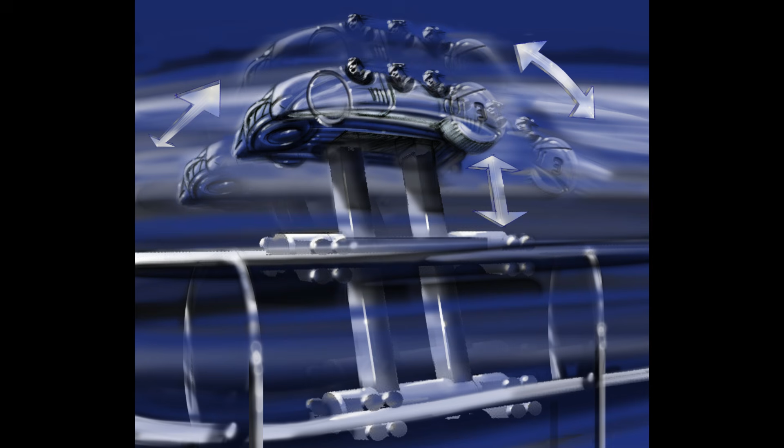The cantilever roller coaster is an interesting concept because it is one that kind of actually does exist today with the Donkey Kong roller coasters at the Universal parks. The major differences stem from the axis of movement which were proposed in the ideas. Now, there were patents filed for this design way back in 1999, which were not approved until August of 2001. Now, these expired in July of 2019, which I believe is probably what allowed Universal to create their own rendition.

The ride vehicle was meant to traverse along a set of vertical rails which allowed the car to shift on multiple axes, where the Donkey Kong roller coaster kind of only has one axis that it traverses. This design was something that was created independently, yet would be built through Setpoint, although, as we all know, it was never truly built. In fact, most people were likely never even aware of its existence because it never had a ton of traction behind it.

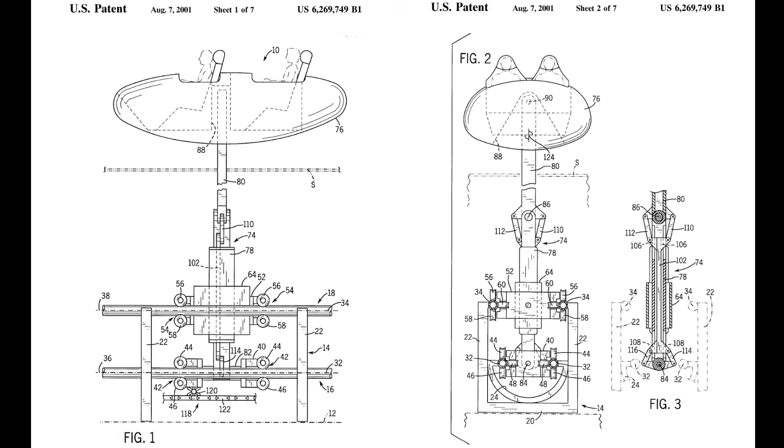This is generally the issue with some of these concepts, is that there's really a lack of information to be found online about these designs, especially things that were from around the turn of the century, where not everything was fully integrated into the World Wide Web yet, limiting the dispersion of knowledge, especially in certain niches. This one is particularly interesting as the concepts and patents for the design were independently pushed, hoping that a manufacturer or a park would pick them up and run with it. This, sadly, would never happen. Well, at least kind of.

Setpoint is actually the manufacturer of the Mine-Cart Madness rides, so it seems as though they may have gotten some heavy inspiration from the original 20 years ago. The optimism for new innovations in the industry was at an all-time high during the turn of the century, and the coaster wars which occurred during that period.

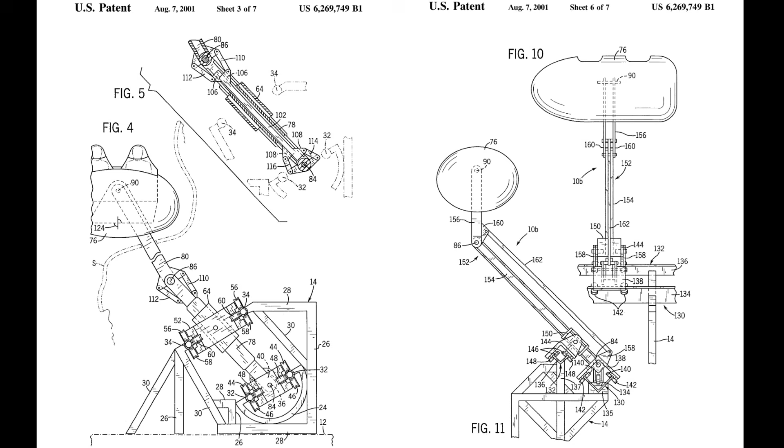The Vekoma dive pretzel is a very unique case, as not only is it the newest model in this video, but it also had a real sale. At least a portion of this ride was fabricated and constructed in China, yet the project was never completed before the ride sat dormant for a few years and ended up getting demolished. The dive pretzel appears to be some sort of crossover between a Eurofighter, a Maurer X-Car, and maybe even a little bit of the Intamin Space Diver.

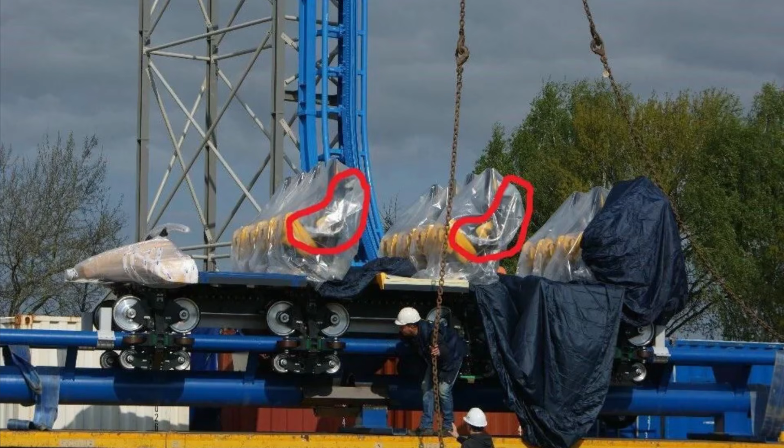The most interesting part of this is looking at the trains, as they appear to have a different form of restraints, which is possibly the first showcase of their restraints which have showed up on their new generation rides. The entire ride looks quite different from anything Vekoma has ever constructed, as it has a completely unique track profiling for them. Now, by the end of 2016, progress on the ride was reversed, deconstruction began, and it seemed as though fabrication of the track was never completed. The entire mall project was abandoned due to funding and never opened in any capacity.

Even if this had opened, more than likely no one would have really heard much about it anyways, as it would have been a small Chinese park, but it's still sad to see the project fall apart this way. There was a rumor about this model being proposed to one of the parks slated for Orlando that never panned out, although I could probably make an entire video about extravagant failures of park proposals in Florida over the last few decades.

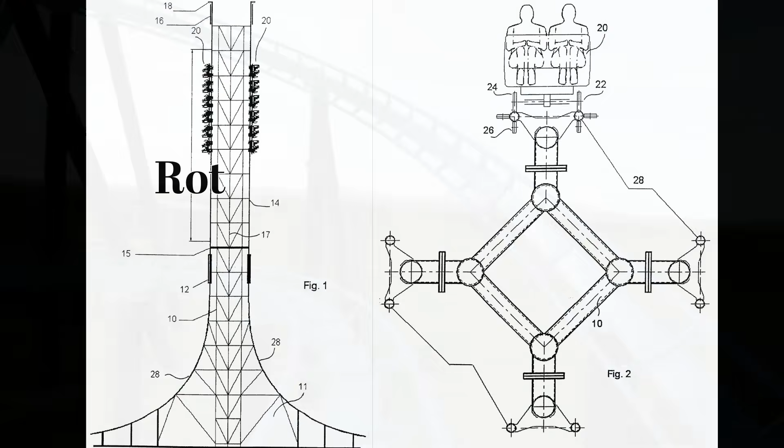The Stengel Tower Coaster is another example of a patented design which made its way into Roller Coaster Tycoon 3. In this game, it was known as the Rotating Tower Coaster. This concept was designed by Werner Stengel, which is somewhat of a big name in the industry, as he has gotten his name into a lot of different rides, even if he's not a very talked about individual as of late. The patents were filed in late 2001 and were approved in June of 2004. Reading through the patented paperwork, there are even two layouts which were attached to the documents which detailed some of the primary components of the design.

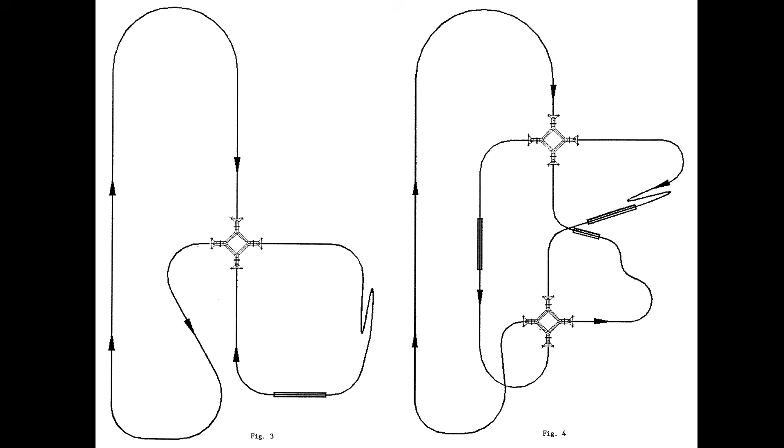The entire idea of the design was to be able to have a vertical rotating post act as a transfer track during the ride. A car would ride up the vertical spike, be pulled up like a kind of a boomerang chain lift, it seems, before the entire tower would rotate 90 degrees to a new track and release the train. The train would travel back down the tower in the reverse direction through some amount of layout before returning to the same tower and spinning back to the original direction. As the tower rotating 90 degrees would need four tracks to constantly have attachment ready, Stengel planned to use all four sides as connections to the rest of the layout.

This looks like it had the potential to be a very dynamic ride, which would bear some resemblance to the family coasters which have begun popping up, where they kind of travel one direction, spin, and then travel back. But perhaps this design was just too far ahead of its time to ever succeed. The technology demonstrated here would allow for some extremely unique layouts and elements. It's quite a shame that this was never a real ride, although it does look to be a technical nightmare, so there's not really too much of a wonder as to why it didn't, especially for the early 2000s.

Now you may be thinking, Giovanola? Really? Yep, you better believe it. Back in their day, they actually had some real innovation outside of a single inverted coaster and two somewhat lackluster hypercoasters. However, nothing ended up working out for them the way that they would have wished. This was something that got showcased at IAAPA in 2000, 2 years before Gravity Max opened. Not only was it before Gravity Max, but it was also quite a bit cooler in my opinion.

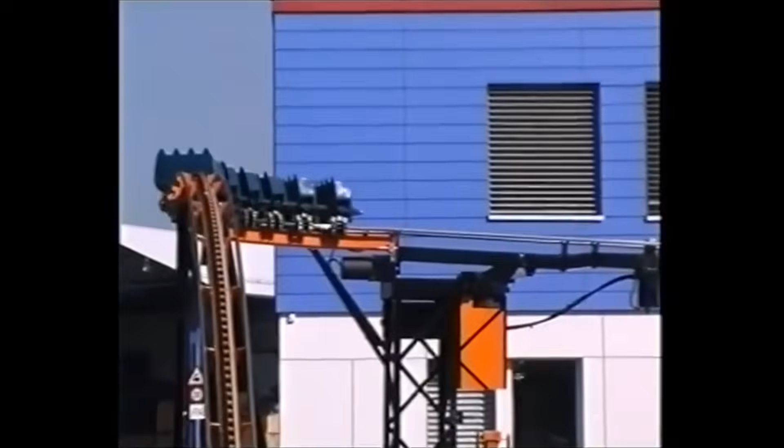While an initial simulation and patent paper which showcased a design with the backdrop of Magic Mountain actually had a more simple truss tilt track similar to Vekoma, their model was much more interesting. An old video from their showcase, which can be found, showcases a small functional prototype. The main difference is that there's a whole lot more degrees of freedom with this tilt track. It appears that there are three rotational degrees of freedom. Not only is it able to tilt along the train's axis, but it's also able to swivel like a turntable and roll side to side, kind of like the banking of a turn.

This system would probably be overly difficult to construct, however, and it would never end up being constructed. Giovanola would only end up building Titan before becoming a defunct manufacturer. It's very interesting to note that Vekoma did release their tilt model at this time and only sold one. Ultimately, there did not seem to be a market yet for this type of ride, and perhaps Giovanola's design was too far from reality to be sold at this time.

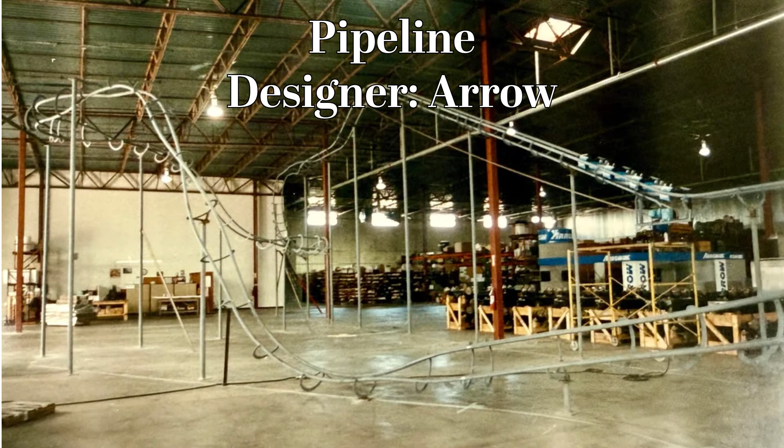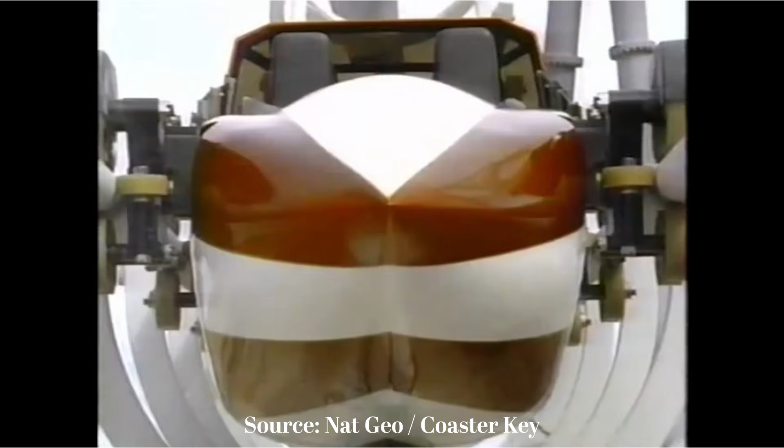Pipeline may be the most well-known failed prototype in this video, although I've not heard a ton of discourse on it. This is another model which slipped its way into Roller Coaster Tycoon 3, as is the next one actually. Their track record with these could practically be considered a curse. If your prototype is in Roller Coaster Tycoon 3, chances are you're not getting any sales. This may be more related to the ease of programming the system into a game rather than actually engineering the components and getting a sale on it, but it's just something funny to think about.

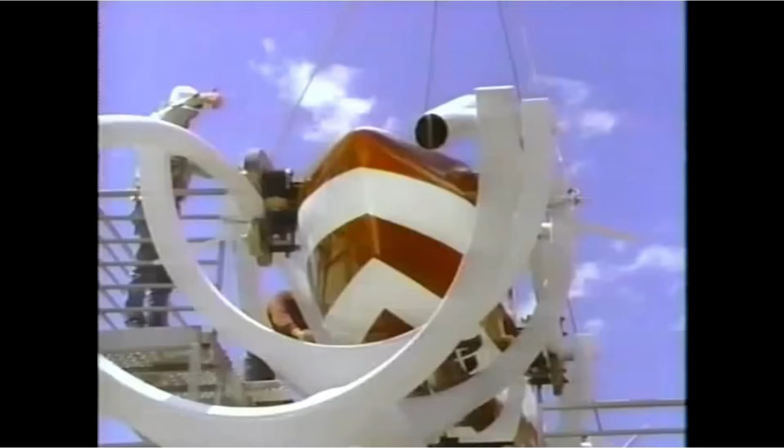There's easily the most information about this prototype compared to any others, despite it originating around the late 80s into the early 90s. It was meant to be Arrow's next major ride type, following their loopers and suspended coasters in the prior decades. A lot of hours and labor went into this prototype, and eventually money as well. This made it beyond the computer screen and models and actually had a model get built in the Arrow facility. This technically means it was built, however, because there were no permanent installations, I don't really count it.

That being said, this generated a lot of attention when it was built and even had real riders on a couple of occasions. The ride fully sinks into the track, attempting to recreate some maneuvers which a fighter pilot could make. The angles which this created were extremely unique, and I really wish I would have been alive and lucky enough to try out something like this.

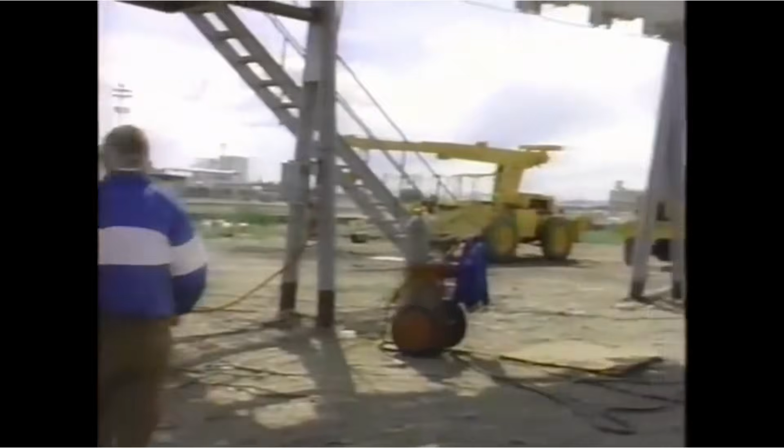The ride was clearly meant to focus on inversions, which may have been part of its downfall. When you really look at it, there isn't a ton that this can do which a standard looper could not. The primary benefit would be tighter turns and smaller cars as compared to the very large drawn out trains which their loopers ran with. Sadly, Arrow struggled to get this ride to conform with ride regulations and eventually abandoned the project, which they hoped to debut in 1992, never having it leave the prototyping phase. However, if the Ultra Twister exists, which it does, I feel like this ride surely could have as well, yet it was just never meant to be, I guess.

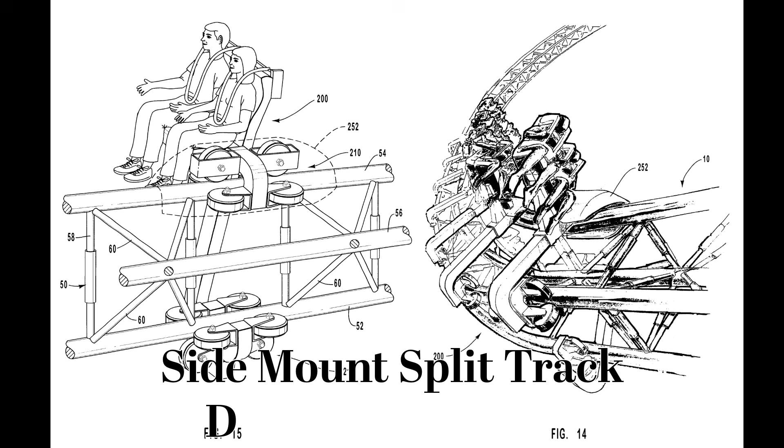So here we have Setpoint back at it again with another banger prototype. This brings one of the more creative innovations on the list, adding a mechanism which has never been done before. As previously mentioned, you can play around and build this model in Roller Coaster Tycoon 3. It seems as though Setpoint was fixed on a side mount ride vehicle at this point in time, attempting to have two tracks combined together to make one square truss, which the ride vehicles would travel along.

The idea was for this ride to operate as a single ride vehicle through a portion of the ride before the track would split and enter a dueling section of the coaster. I just absolutely adore this idea. The spectacle of a track splitting during a ride, allowing for a portion of the ride to be dueling, is just so sick. And it was not just meant to be a family coaster.

The patented paperwork for the design shows a number of different inversions and elements which the track type would allow for you. And let me tell you, these ideas are absolute gas. It's maybe one of my favorites of all the designs. I want something like this to be real so badly. The capabilities of this ride seem like they're through the roof compared to a lot of other ideas. There's just so many things which this ride can do which other rides are not capable of.

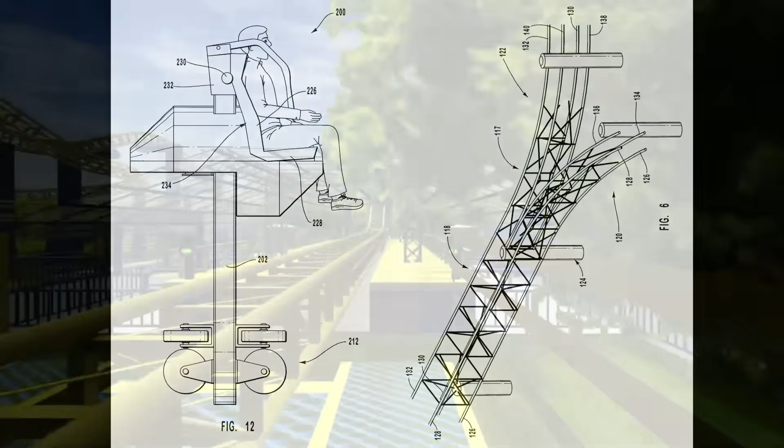Now, do I have even a semblance of a clue of how the ride vehicles would work to remain close and clasped together and unclasped? Nope, but I'm sure they did at least. And if they didn't, well, that's probably why the idea got scrapped. But please, someone make this happen. The design was in the works in the early 2000s, and the patent expired in the middle of 2018. So that does leave the door open for another company to investigate these designs and come in with their own rendition in the future. And boy, do I hope someone does.

Narrowly missing out on being the newest model in the video is the Backtrack design by Great Coasters International. Backtrack is such a well-polished model that it could totally be sold today, and I would not be surprised, although it's not promoted by them anymore. This model was published on their website in the News tab during day one of the 2012 IAAPA Expo, but it did not get a dedicated section for the new model. Using the Internet Archive, I found the news archive sat on their page until June of 2020, when it and all of their old news stories were removed as they overhauled the entire design of the website at that time.

I find it rather interesting that there was no promotion of the design further outside of IAAPA in 2012, unless they ran into some sort of design complications. It was a bit ahead of its time, as family boomerangs have a huge market right now, but we could use some spice with the Backtrack. The design and the models showcased at IAAPA seemed like a very solid offering, and I'm surprised that there were no buyers for it. The capacity is really the only concern to be had about it.

Now, we know that parks seemingly could not care less about the capacity of their rides, but in 2012 it was a different time where capacity was still more of a concern. GCI advertised about 400 to 500 riders per hour and a speed of 32 miles an hour, which is honestly a perfect family coaster, and it also has a relatively small footprint, which would be good for smaller parks. I would be rather curious to know why things never worked out for GCI with this model.